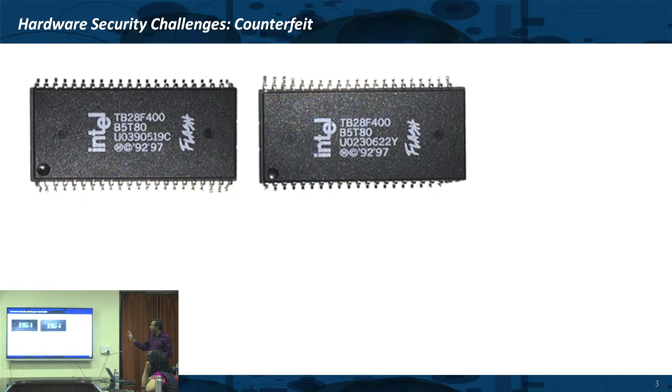For example, here you see this is what we call counterfeit ICs. Counterfeit ICs are something which looks exactly similar. You see the 2 ICs are looking very similar, when one of them is actually authentic and the other one is not. Because if you open it up, you will find that the connections are very different. You kind of just use these chips and then throw it as electronic waste.

Someone can go and collect it from the garbage and just take the packaging and put their own chip and again repackage it and claim that, oh, this is an Intel chip that I'm selling. So they could be inauthentic, they could be recycled, they could be remarked. In fact, you will be amazed to know that 60% of the chips that the US defense uses, like the Army, Navy, are counterfeit. So it's very difficult to prevent this thing.

So the question is, can we use new design or new materials to solve this kind of problem? So that is one problem. The other problem is what we call reverse engineering. This is a term you may have actually heard. One of our neighbor countries is actually expert in doing reverse engineering. They literally take cross-sectional TEM or SEM images of the chip, and then they redesign it.

And now you don't need to buy it from the US anymore, because now you have your own chip. So this is what is called reverse engineering. You just look at the design and then reverse engineer it. This is again a big problem, because then you lose your competitive advantage. So therefore, if you look into the hardware security domain, there are different types of problem. One is authentication, whether the chip is authentic or not. The second is whether it is recycled or remarked.

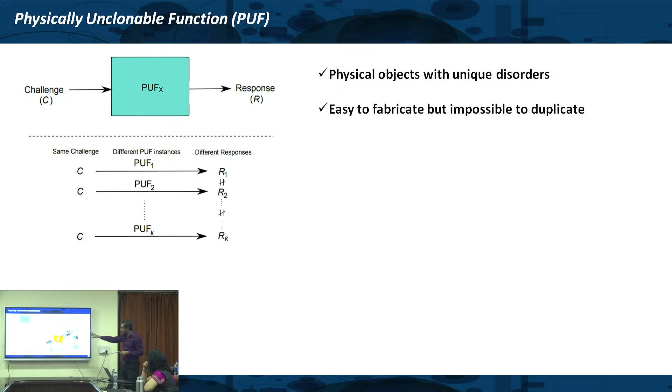The first PUF was discovered only 15 to 20 years back. This paper came out in Science. Here you have a liquid containing a lot of nanoparticles. That is your physical medium, or this PUF. What is this PUF? It's just a suspension of nanoparticles in a solution. We can all make it, right? Now I can use this as a physically unclonable function because we do not know how the nanoparticles are going to be dispersed in this solution. It's a very chaotic or random medium.

So now if I shine light on these nanoparticles and place a screen in the back, what will it create? It will create an image which we call a speckle pattern, because the light will diffract based on the position of the nanoparticles, and I will get an image in the back. So what is my challenge? My challenge is the light that I am putting in, and the response is the image that gets created. So now I have created a physically unclonable function using suspended nanoparticles.

Makes sense? Now let's see whether it's a PUF or not, because it has to satisfy these two criteria. Only then can I call it a PUF. Just having a medium and having a challenge and response is not good enough. It has to satisfy these two criteria.

So let's see the first criteria. The first criteria, what I am saying is the challenge is the same. That means I will keep the light source the same and change the medium, which is this solution with different amounts of different nanoparticles. Will the response change at the background? It will. So it's impossible to know what is the exact position of the nanoparticle even if you make it every time.

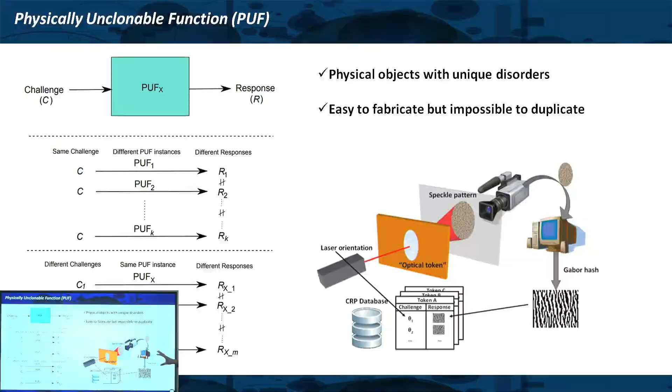Right? So if you keep the medium the same and simply rotate the angle from which the light is coming, or if you change the color of the light, then the pattern may also change. So therefore, if you apply different challenges to the same PUF, the response is different. Make sense? So therefore, we can then use this as a physically unclonable function. But the problem is, this is something I cannot use for a chip. I mean, where will I get suspended nanoparticles within a chip? So what is the solution?

And then if you put two metal contacts and measure the current, not every device is going to give you the same response. And if you measure a lot of devices, look at the device to device variation. And generally you will discard this material, saying that this is useless because I cannot reproduce every time the same IV characteristic. And this is useless for anything that I want to make a logic circuit or any form of neuromorphic computing or sensing. But this forms a background of physically unclonable function because you are looking for variation.

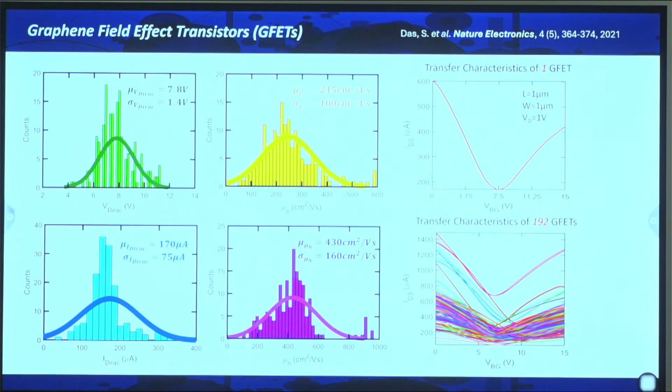This should not change with time. Okay, I will come to that, because if your password changes with time without you knowing... so it should not. That is actually the case. Once you make the device and measure it, it remains stable. But it is just that from device to device, there is a lot of variation. That you have to ensure, right? Over time, you don't have a lot of drift.

So now what you could do is you can take an array of these devices, right? And let's say there are 8 devices. So 8 devices will give you 8 unique responses, right? Because here you are intentionally making sure that there is a lot of device to device variation. One approach is to make sure that your devices are all exactly the same, right? That's what we generally do when we are working with material synthesis or device fabrication. Here the philosophy is exactly the other way around. You want to introduce variation, right? Once you have this variation, then you can literally go.

So your challenge now becomes your voltage, and your response now becomes current. Okay, that makes it more possible for me to integrate it with silicon chips, because current and voltage should be the input and output, not light, right? So now if you challenge it with the voltage, you will get a response which is current, and for any given voltage you will get a different current, and that you can pass through an analog to digital converter like we kind of did last time, and you can get a unique code, right? So now you have for each array maybe a 64-bit key, like the password, right? So now we have generated a physical password.

Got it? Now if I go to another array, you see this key is different because the devices over there are also going to be different, correct? So the key is different, and I can keep doing that. So I kind of keep creating new passwords using just these arrays of devices. So now I have created this physically unclonable function, but now I have to test a few things, right? And I'm going to go through that, but is this part clear, how we used the device to device variation, which is otherwise very bad, for a useful application which is really very needed to ensure the integrity of the semiconductor manufacturing process?

Correct. Yeah. Yes. You should have a larger matrix. Exactly. Because if you have a 1-bit number, then it is 0 or 1. So anybody can predict your password has to be between 0 and 1. So therefore the length of the password should be large, right? Because if it is a 4-bit password, there are only 2 to the power 4 combinations. That's why we have made it a 64-bit password. What is 2 to the power 64? That's a huge number, right?

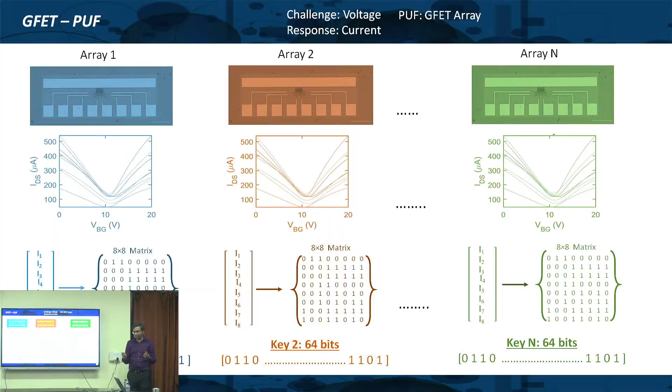So today, are you aware of this RSA encryption? Whenever you send information through the internet, it is encrypted, and at the beginning they put some of these numbers actually, and these are 128-bit long. The problem today is with quantum computing: because these passwords are software generated using algorithms, there are quantum algorithms which can break into these things very easily, because these are generated classically. So if you have 2 to the power 64, 2 to the power 128, it's such a huge number. Even if you give a supercomputer, it will take probably 10 years to find that password, because it has to do trial and error a lot of times. But quantum computers are so powerful, they can break it in 2 minutes, right?

So hardware security is becoming even more important, maybe 10 years, 20 years down the line when quantum comes into the picture, and quantum cryptography is actually a much bigger, interesting area than even quantum computing. Because anybody who gets a quantum computer can break into any of your bank accounts, your health information, any personal information can be hacked very easily with quantum computers.

Okay, so this is fine. So we have generated the keys. Now they have to satisfy certain criteria. And you see the number of total challenge response pairs that we can generate is 2 to the power 64, which is 1.8 times 10 to the power 19. That's a huge number. And you can see that it simply increases with the number of bits.

So 128 will be 10 to the power 38, right? It will be the square of that. Okay, so now the next thing is, we generate these keys using more complex circuits. This is also not always needed.

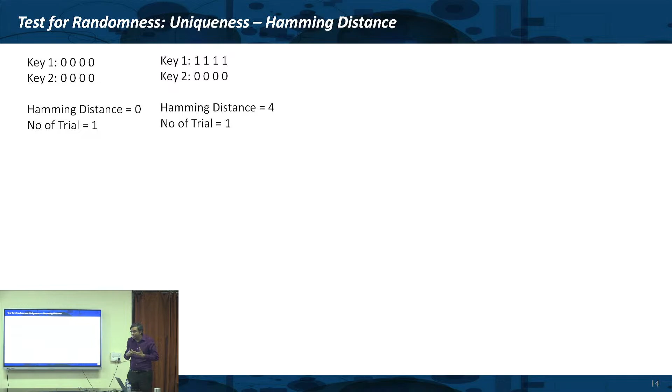So therefore, if I know key 1, how many trials do I need to do to predict key 2? Just one, correct? But then if I give you keys of all ones and all zeros, then what is the Hamming distance? 4, because I have to flip 4 of these bits. But here also, what is the number of trials? Just 1, because if I tell you the Hamming distance is 4, then you know that I need to change it 4 times, right.

So knowing the information about one key and this Hamming distance, correct, will allow you to know the number of trials. This part clear? Okay. But now let's say, for example, if I give you these two keys, and I tell you that the Hamming distance is 2, maybe let's not look into this, I will just do it on the board.

I give you a key which is 0, 1, 0, 1, and then I give you this information that the Hamming distance is 2. Can you predict key 2? Second key. Okay, you tell me one, where you have to change 2 of these. 2 means that you have to change 2 of these. Okay, so you predict 1.

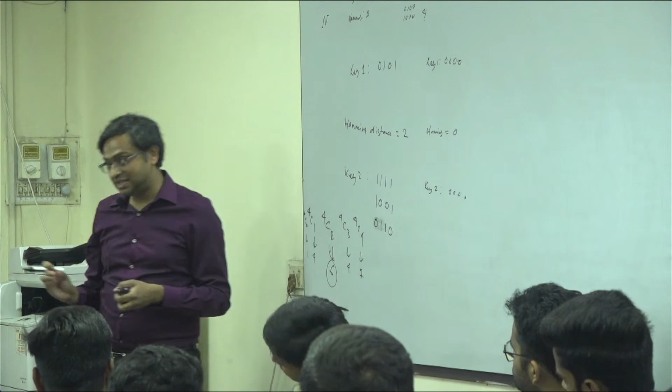So if you have a key of length n, your Hamming distance should be n by 2, half. That gives you the maximum number of trials because you want to make your adversary's job the most difficult one. Makes sense, right? So if you have a key of length n and the Hamming distance is x, then the number of trials required is nCx, and the maximum number of trials will be required when x equals n by 2.

So in a GFET case, n is 64, so we should get nearly 32. And 64C32, look at the number of trials required to decode: it becomes 10 to the power 18. And if it goes to 128 bits, it will be even larger. So once you have these keys, you have to test the Hamming distance. You just write computer code, because you already know your keys from what your hardware generates, and check whether the average distance between key 1 and key 2 is 32. Makes sense? So that is the second rule.

The third one is correlation. How related these keys are. If both keys are exactly identical, they are absolutely correlated; the correlation coefficient is 1. If they are exactly opposite, the correlation coefficient is -1. This is just the mathematical formula of correlation. And the correlation is 0 only when, again, half of them are different. Then there is no correlation.

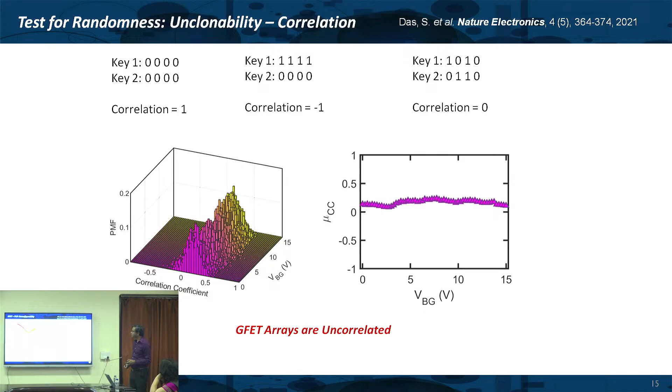Now these GFET arrays are also very interesting because they are reconfigurable, which means that if your key is compromised, let's say for example somebody knows that the key for this chip is this one. What do you do when your password is compromised? You go and change it. But now the problem is if it's in the hardware, how will I change it? It's already there. If somebody knows what are the currents from each of these devices, then they have really accessed my chip and I have no way to recover it. Compromised means it's fully compromised.

These GFET arrays are very unique because you can actually reconfigure them. If we apply a large voltage pulse to graphene FETs, because of this memristive property of graphene, which we did not talk about, but some of you are interested in memristors, I know. So memristors can also be used for physically unclonable functions. So once you change it, because it goes into a different state, and each device will go to a slightly different state, you can create a new key.

And you can show that the new key that you create also follows all the principles that we talked about. The entropy is large, the Hamming distance is 32, and they are not correlated with the previous key. Which means that you can have hardware keys which are also reconfigurable. If it's compromised, you just simply go and reprogram your graphene devices. Then the key is again recovered, just by applying bias. Like in a memristive device, you apply this forming process and different cycling processes.

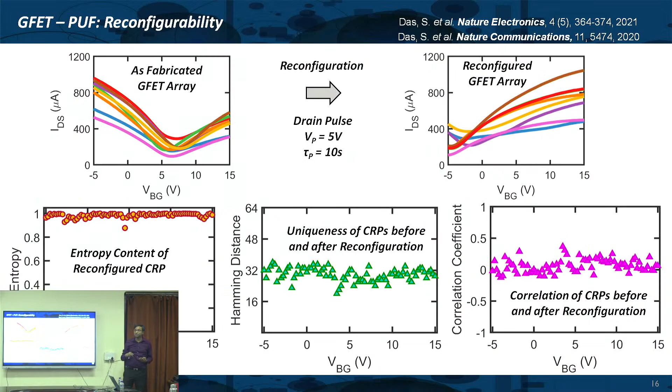But the take-home message is you can actually get reconfigurability in a PUF, which is not possible with silicon PUFs, because silicon is not a memristive material. So that's the advantage of 2D materials, because otherwise you will say, why are you doing it with 2D materials? The idea is that 2D materials give me this opportunity of reprogramming the device. If you are more interested, we have written two papers on this. This Nature Communications paper is about graphene memristors, and this Nature Electronics paper is about the graphene-based reconfigurable PUF. It was almost four years ago now.

And then you can keep reconfiguring it, and that's what we show. This is not as important, but you can not only reconfigure once, you can reconfigure it multiple times. The more times you can reconfigure, the better it is. So that is something we can do with this PUF.

And then there are other things that you have to check, because you asked about reliability. This has to be reliable with different voltages that I apply. The conductance should not change. And graphene is good because it shows a linear IV characteristic. So when you are working with a memristive-based PUF, make sure that the memristor has a linear IV characteristic, because then even if the voltage changes a little bit, your current can change, but your conductance is not changing. That is one.

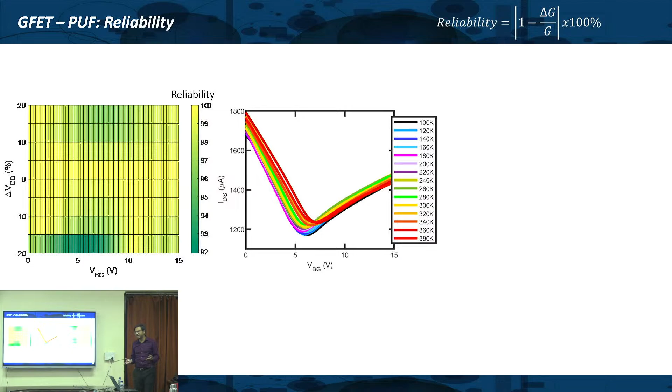You have to also show that the devices do not change too much with temperature, right? Because you do not know at what temperature the chip will be accessed. So your PUF should remain the same with temperature. So we show that it is stable with temperature, and these are essentially the reliability. Almost 90 to 100% of the cases the PUF remains the same. Some changes will happen because this is hardware. You have to deal with that. So GFET PUFs are reliable against supply voltage and temperature variation, which is also very critical for a good PUF.

Okay, and then finally comes this part: whether they are resilient to machine learning, because nowadays we may not need to do all this Hamming distance calculation and stuff. Can we train, let's say, for example, I collect a lot of graphene device data, this variation, train an artificial neural network, and ask it to predict what will be the next key, or what will be the possible keys. And this is something that we have to check.

So here we are using something called regression-based machine learning. I will probably not go into the detail of that. These are all the estimator functions and stuff. So we are saying that we are going to predict up to a certain part of the key, and then can it learn what will be the following bits. That is how we train it. You see, these are the estimator bits and these are the predicted bits. For example, not everybody needs to know your full password, but if they have a part of your password, life may become actually easier, right?

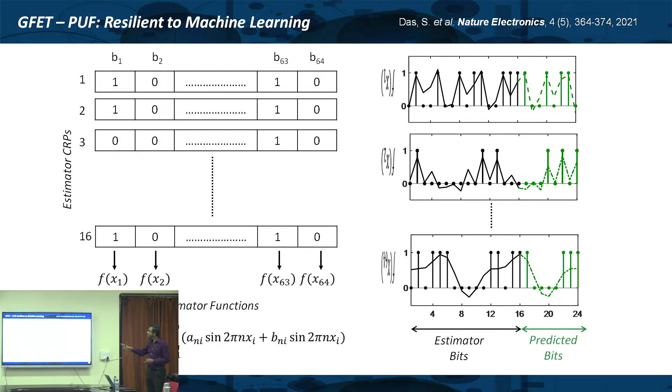So that's what we are trying to do over here, and there's a lot of results over here. Don't get overwhelmed by this. If you're interested, you can read the paper. This is actually resilient to machine learning attack, because this is coming from natural randomness. There is nothing to learn. Machine learning could only learn something when there is some underlying physics going on. This variation is kind of random. So therefore, we show that at least the regression-based machine learning or the support vector machines cannot actually learn these things.

And then we go into an even more powerful machine learning tool, which is the generative adversarial neural network, or GAN. This is what, when you ask ChatGPT to produce a picture of something, it uses, the generative one. Because at the end of the day, all our innovation comes from the generative part of our brain. It is not something we have seen earlier, but we can create, like a poet or a novelist or a music director. They are creating something literally out of nothing, or maybe their knowledge. So these generative networks are becoming extremely powerful. Deep fake is this technology. It can create things which look like an art piece created by Picasso, for example.

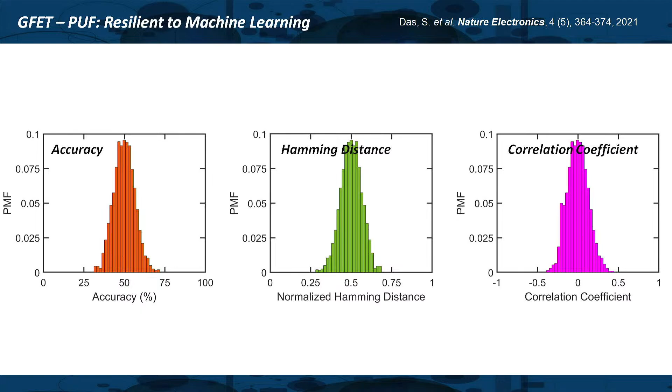And as I told you, you don't have to restrict yourselves to graphene. We can also use MoS2 devices. MoS2 devices also show device-to-device variation, and then we can create a similar PUF, but now it's a MoS2 array. If you are working with any other material, you can use that too and create the same matrix. It doesn't have to be just 2D material, but you have to prove that the other factors I spoke about, the entropy, Hamming distance, correlation, machine learning attacks, they can survive. Okay, this part is all good.

This is what we show over here, like the Hamming distance is like half. So this is all about physically unclonable function. If you have any question, ask me. I will go into the next topic on hardware security. Any questions about physically unclonable function?

I feel like this is something a lot of you who are working with materials can actually do. And it doesn't always have to start with IV characteristics. You can also use Raman, PL, XRD data in order to create that PUF. Because if you measure the same device, let's say same material that you're synthesizing, and take the Raman at different location, the Raman peak position will be slightly different, right? And there have been papers where people have actually used that to create physically unclonable function.

Because then it is like an optical PUF, because your input is kind of a light and the output is also you are measuring some of the vibrations, right? So you can really use any kind of a technique even beyond IV to show that it is a random entropy source and it can be used for physically unclonable function. Okay? Yes?

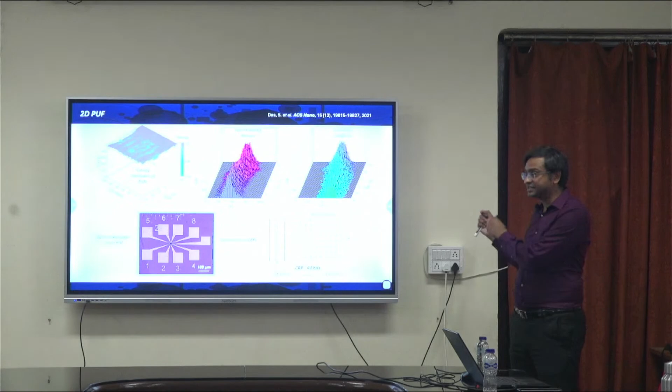No, this is to authenticate. Because let's say, for example, if you have chips from Intel, right, and then there is a startup company which is also making a chip, but they could package it in the same location, and they could bribe the packaging facility so that, okay, you put the Intel cap on our chip, right? Now if somebody comes to you and sells you that chip, you will not know which is actually an authentic Intel chip.

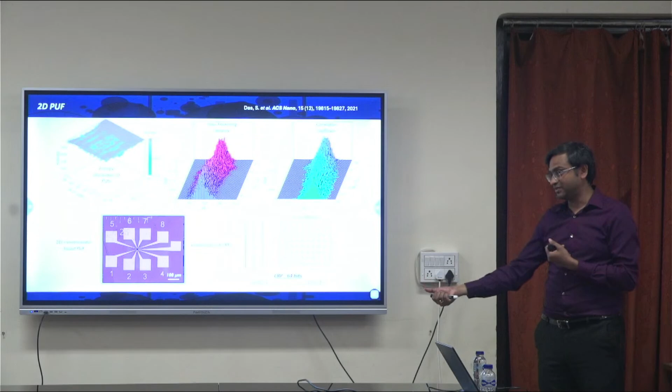But then Intel can tell you that, okay, in my chip, you should be able to use this password to make it work, because we have put these graphene devices, and they don't have to even really tell you what is there, right? They will just make this kind of an arrays of devices, and they will measure and know the key, and then they will tell you this is the key that should be there in our chip, which is not available to your adversary. Even if they make a graphene chip and put their graphene devices, it will not be the exact key. You see that, right? So this has nothing to do with the functionality of the chip. This has to do with the authenticity, and this is a big problem in the industry right now.

Could be good, yes. Optical would be easier, it is just that it has to go through your packaging, because the packaging material is often not transparent. Correct. Agreed. You can, I mean, there is pros and cons in both aspects.

I think whenever you put the chip on a printed circuit board, you have access to the IV characteristics of the chip. So it is much simpler to do it using IV than using optical methods. Because at the end of the day, it will be integrated into some circuit, right? And you need to simply write a code to first check whether it's an authenticated chip or not. Possible, yeah. Okay, this part is good, right?

Okay, so now we will go into the next topic, which I call camouflaging, which is to prevent reverse engineering. So what is reverse engineering? Reverse engineering is, let's say for example, you have a circuit which is designed by some US engineer, and then it has been sent for production. Somebody actually opens up all the packaging and sees what is the configuration, and then they start claiming that this is my design. And then they can sell it at a lower price to someone else, right? This is reverse engineering pretty much. So we have to prevent this reverse engineering.

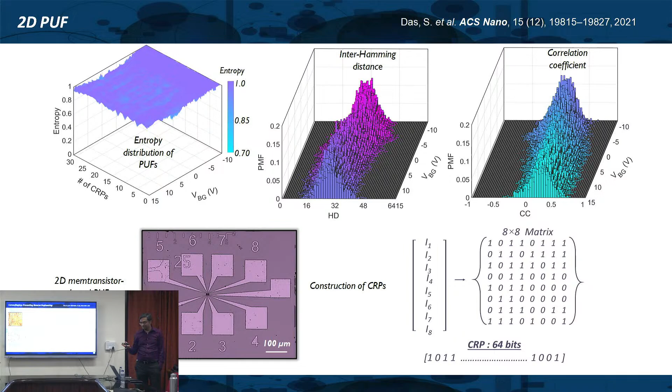So in order to stop the reverse engineering, we have to fool our adversary, right? So this is something I am going to show you now. How can we use unique properties of 2D material to camouflage circuits, so that even if somebody sees the circuit, they will not know how it functions. If they cannot know what the function is, then I have been able to kind of fool them.

Then we spoke about this oxygen plasma treatment, didn't we? And when you do treat it with oxygen plasma, it's like a self-limiting process, but you can actually convert the top layer into transition metal oxide, like moly oxide, tungsten oxide. And these oxides are transparent, because most of the oxides are transparent. So therefore, the appearance of the flake does not change.

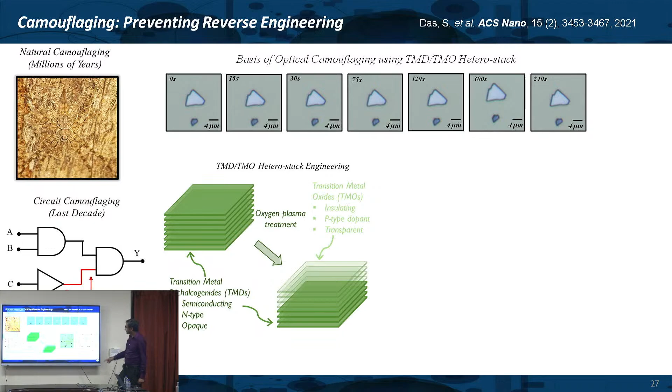Now let us say, for example, if I go ahead and make a device, right? I do not know whether it is an n-type material, whether it is a p-type material, and if I do half and half, how does it become? It becomes a p-n junction, which is a diode, right? So now your resistor, transistor, diode exactly look alike. Makes sense? So now if I go and start building a circuit, I will not know, for example, let me see, there is an example coming up. Okay, there is some more data actually, just showing what happens.

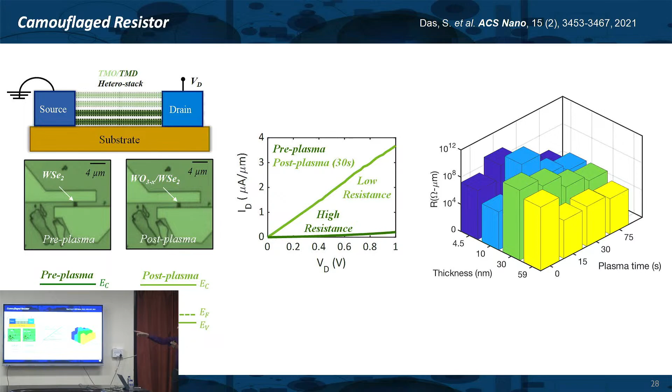You see pre-plasma, post-plasma, I can use it as a resistance, because generally you cannot change the resistance value of a resistor, right? But now through oxygen plasma, you see, I can get two resistance values without changing its appearance. So your adversary will not know whether it is a high value resistor or a low value resistor, correct?

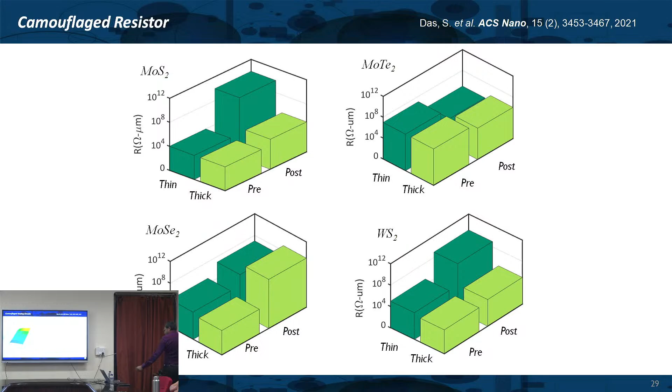Got it? So if all these elements are simply resistors, will you be able to say what this circuit is? This is just a voltage divider, right? Correct? But if this is a resistor and this is a diode, what will be the output?

A lot of you probably have not taken. This is a rectifier, right? If this is an NMOS transistor and this is a PMOS transistor, then this is kind of an inverter, right? So depending upon what these elements are, the function of the circuit, the output and input are changing, right?

So for you to know what is the output for a given input, you need to first know what these elements are, correct? Understood, right? So if each element looked different, then by looking at it, you will be able to tell, oh, this is a resistor, this is a diode, so this is the function. But if you do not know any of this, how many trials will you need in order to find out the actual input output? Because then you are predicting.

Exactly. Very good. 3 to the power 4, because for each choice here, I have 3 choices here, 3 choices here, 3 choices here, right? So 3 to the power 4. This is what I am showing, that if there is a circuit which has P elements, and each has got m functions, then this is the number of trials. So you see the idea of camouflaging, right? If everything looks alike, it becomes exponentially difficult for your adversary to figure out the function. And this is something that I have shown you using a simple circuit diagram.

Here there are only two elements, right? So here is a resistor, and here is this camouflaged element. If this camouflaged element is a resistor, then it's a voltage divider, and if it's a PN junction diode, then it's a rectifier. The output is very different. So what did I accomplish? I camouflaged my circuit. Isn't that true? So I don't care about reverse engineering, because you can look at what the design is, but you will have to go through this many trials to tell me what it is actually doing. Correct? And the same thing applies for even bigger circuits.

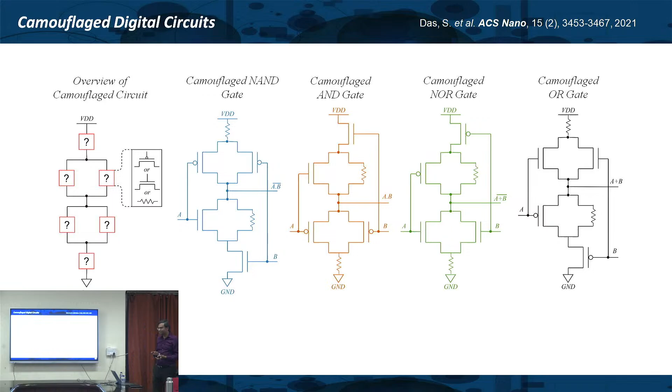This is another aspect, and now you can start doing it. This is an overview of a camouflaged circuit. So here, forget about this. If I create a circuit like this, because all our AND gate, OR gate, XOR gate have a particular structure, right? How they are arranged, correct? But now, if these are all kind of question marks, I can use a generic structure, and then I can create individual gates just by, so therefore, the OR gate, XOR gate, NOR gate, XNOR gate, everything is going to look alike, right? So I can completely fool reverse engineering. That's the thing that we are trying to do.

The only way to find out whether there is something going on, you can now start taking some SEM images. You can start doing some AFM, because the height will be a little bit different after the oxidation, right? Or you can even do, let's say, Raman or PL, correct?

And then you can find out that, oh, this material has been oxidized, correct? Material characterization. You see, pre and post plasma treatment, the Raman shift is there. Then you can say, but think about, in your integrated circuit, how many transistors are there? 1 billion. Are you going to take SEM images of 1 billion transistors? Are you going to take Raman, PL or AFM images of 1 billion transistors?

You can, if you are given the age of the universe, right? So nothing is ever foolproof, but the question is how much time and resources your adversary has to invest in order to decamouflage it, right? It is always the race between the cop and the thieves, right? You have to be ahead. You have to be well ahead. If you are the thief, you have to be well ahead, right? So that the cop can never catch you.

So they will actually take cross-sectional TEM, SEM. They will open up the chip, and then some countries have resources and manpower. Okay. Yeah. You see, it is also not really about needing to know every detail of the chip. If you know some details, then you understand, right? Because your chip is not going to be unique at every position.

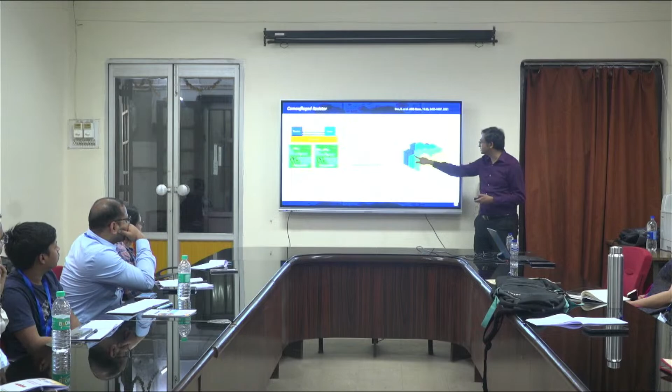You see, depending upon the plasma treatment time and the initial thickness of the flake, the resistance could be anywhere. So even if you do a Raman, you might be able to say, okay, I know that it has been plasma treated, but how do I know what is the exact resistance value? And as I told you, in the R2R ladder, if the resistance values are R versus 2R, then the function is completely different. So even if you do that, it is even more foolproof. It's difficult. This is where I was talking about the number of trials that is required, right? Remember this plot that I showed? Yeah, this one.

Well, it depends upon what philosophy you want to follow, right? This is a discussion we can have off camera, not on camera. Okay, so this is what it is.

So I have told you two different things, and let me skip this part because this will be too much. I will go to the summary. So you see that hardware security is absolutely important, and I think 2D materials could be a rescue, both from the point of authentication as well as preventing the reverse engineering of these different chips, right? And you can also use other materials. We are working on 2D materials, and if the next generation of technology is 2D, then it is better to do everything in 2D, but it doesn't restrict the use of other kinds of materials for this hardware security application.

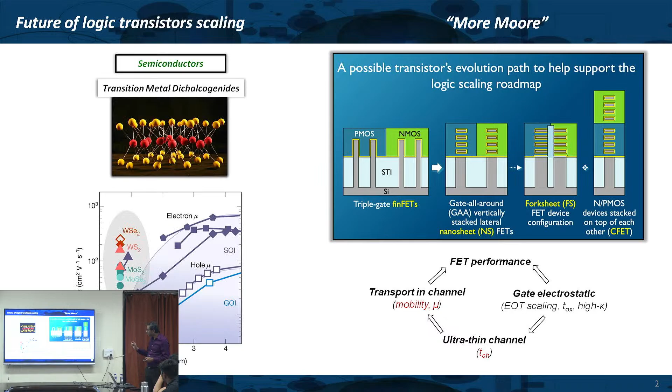So, we have already highlighted that the future of logic transistor scaling, which is literally to revive Moore's law, is going to be based on some of the newer materials, and 2D materials are one of the prime candidates. Now, if we think about Moore's law, even if we make the transistor very small. So today we are talking about the 7 nanometer node, TSMC has already introduced the 5 nanometer node, and there are some angstrom nodes, but I want to first clear the confusion that these nodes have nothing to do with the transistor channel length.

The transistor channel length today is kind of stagnated around 20 nanometers or so. It is not scaling. So when they come up with this node, it has a different meaning altogether. We do not really know the exact transistor dimension for TSMC's most advanced 5 nanometer node. So the limitation of why we can't make the channel much shorter has nothing to do with the fundamental material properties. It has more to do with the lithographic capabilities.

The tools made by ASML, a company based in the Netherlands, make the most advanced EUV tools. They cannot currently scale down how small a feature we can get using this EUV technology. Once that is enabled, these materials are ready to be scaled much further. But one day we will probably get to a limit where the transistor channel length cannot be made below, let's say, 10 nanometers.

So what do we do in order to get more transistors? Because Moore's law is nothing but your transistor chip density increasing every 18 months, and that is not happening right now. What is happening is we are simply putting more and more chips together, and this is what all the cloud servers are. The size of these huge data centers is literally exploding.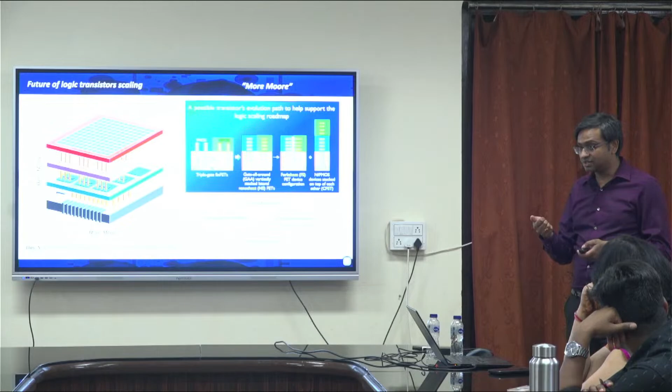So the way forward is literally trying to stack transistors on top of each other, because if I can start building vertically, this is precisely why if you go to a city, you will find all the apartment buildings are tall, because you cannot give space to everyone in the lateral dimension. So you build skyscrapers. That is why 3D integration is going to be important for logic transistor scaling and to revive Moore's law.

And to some extent this has already happened for memory technology. The flash devices that we spoke about, and the flash drive that many of you are carrying right now, do you know how many levels of transistors are there? There are 232 tiers. It is a 232-storied building inside your flash drive. In fact, the most recent one that Micron has introduced has 500 tiers. It is even bigger than the Burj Khalifa. The Burj Khalifa has, I think, around 200 floors. 232, and now it is 500.

So this is literally building skyscrapers inside the flash drives that you are using, and that has given you this amazing memory storage capability. Just 15 years back, all these flash drives used to only hold megabytes of data. Today they can do terabytes. How? Because of 3D integration. So 3D integration has already shown us what you can do with storage. It has not been possible for compute.

Therefore, the size of your memory chips has gone down while the data centers have exploded, because we could not do 3D integration with silicon devices. Why? Why could we do it with memory, but not with logic? Because once you have the first tier of devices, since silicon is grown at a very high temperature and then you make these devices, if you want another tier of silicon on top, you have to increase the temperature again.

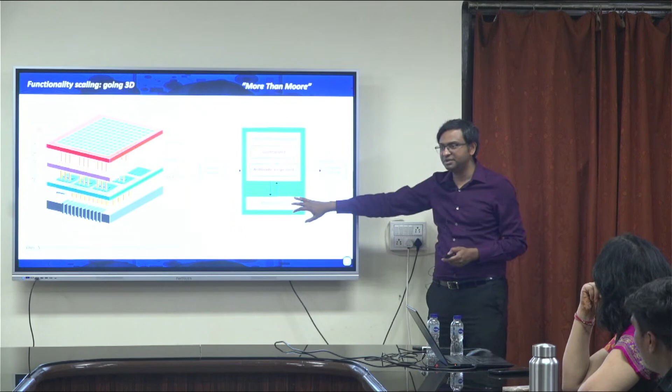Okay. And then, as I told you, there is this problem of your logic unit and the memory unit being separate for neuromorphic computing, because at the end of the day the brain is 3-dimensional. If you really need to have a computing power like the brain and make it small, you have to start doing 3D, because the brain is actually 3D, correct. When we have this huge gap, remember the size of a data center is like a football field, and our head size is like 6 orders of magnitude smaller. Why? Because it is 3D. The chips are not, right.

So, we have to start doing 3D also to address the critical need for artificial intelligence or neuromorphic computing, because of this problem that we had a lot of discussion on, this neuron synapses and the separation between logic and memory. So, now in this 3D chip, you can dedicate one tier for memory, one tier for logic, and they are right next to each other, correct.

So, you can do this kind of a functionality scaling as well, and one tier could be for sensing. So, everything is now compact, just like how your brain works, right. Your different tiers of neurons simply do different functions. That is something you can do with this 3D integration. And this is a slide that you have already seen. So, this can actually mitigate a lot of energy challenges for the next generation of neuromorphic and AI chips.

Now, there are different types of 3D integration. You can do a wafer to wafer bonding. Okay, I will not go into too much detail on this, because I think none of you are from this area. There is a chip to wafer bonding and there is a chip to chip bonding. They are just different ways you bond them, and then you use this technology called the through silicon vias.

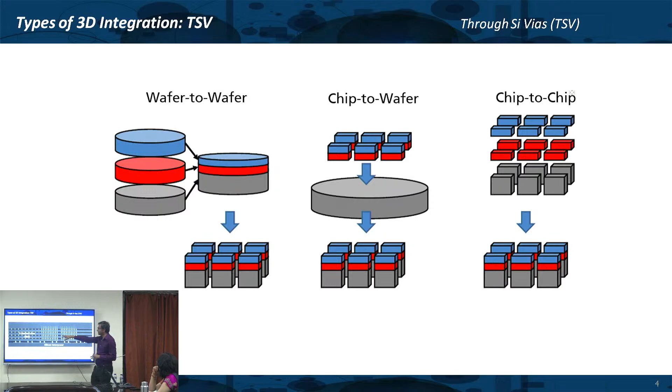So, not only are they scaling the memory technology in the vertical direction, they are also stacking chips on top of each other. And that is what is happening with your most advanced GPUs and TPUs. So, they use this through silicon via technology. This has already been commercialized. You can do it for DRAM. This is the high bandwidth memory. This is all through silicon vias.

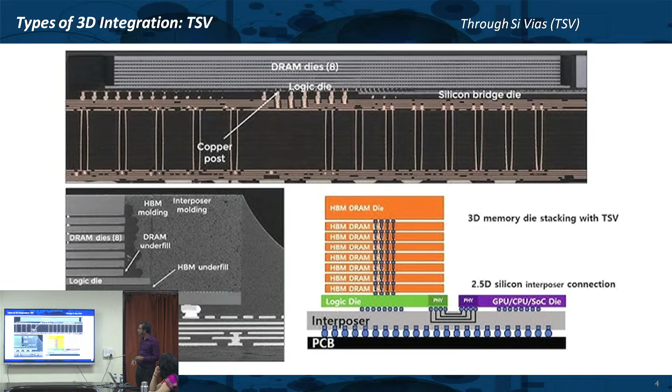Okay. So, generally the key step of the through silicon via fabrication is that you need to really do this deep reactive ion etching, in order to create this high aspect ratio of vias, because these vias are very tiny in the lateral dimension, but very long. So, you are trying to literally dig a very deep hole, and that is always a very big challenge for this through silicon, because you are literally digging it through the entire substrate, right.

Just think about digging a very deep and narrow hole in the ground, a very difficult job actually, right. And then you also need to deposit a thin insulator layer on the wall of that, so that when you deposit metal, the metal does not diffuse into other unnecessary parts. So, that is the other thing. So, isolate the TSV from silicon, and then you need a barrier layer like titanium or titanium nitride, because you have to stop the metal diffusion. These are called the diffusion barriers.

And copper is most commonly used to fill these vias because of high conductivity, using electroplating techniques, but tungsten and polysilicon are also alternatives, and then you do chemical mechanical polishing in order to ensure that the TSVs are planarized. So, there is a lot of fabrication process that goes into just fabricating the via, and we are not even talking about fabricating the chips. Just to connect the chips, you have to go through this extensive process.

It's pretty expensive. Okay, so the challenge is that you need precise etching, metal filling, planarization, a lot of processes, and then the TSVs introduce hotspots in densely packed vias, because in certain areas, if a lot of computation is going on, the temperature could be very high, and that could start thermal migration of copper, and that can really mess up your devices. Okay, so TSVs are good, but they are not the ultimate solution.

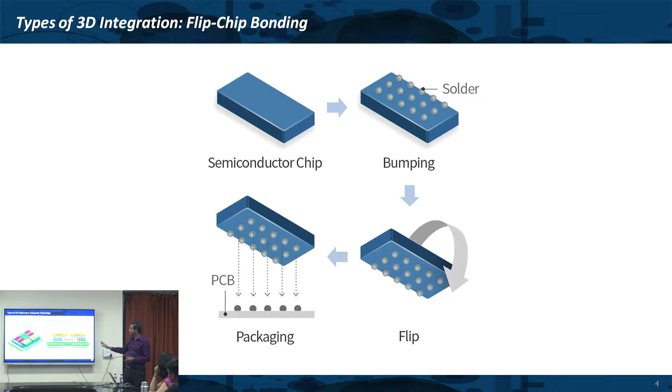Okay, there is a new technique which is called flip chip bonding. Again, I am not going to go into too much detail on this, because it will not be that interesting for this audience. And there is also 3D heterogeneous packaging, where you take a memory chip, you take a logic chip and put them on an interposer or a packaging substrate. So, these are just different ways the industry is currently doing 3D packaging, which is also a big thing, and some of you may be interested in 3D packaging, because this is most likely going to come to India. Okay.

From the Indian perspective, the Indian Semiconductor Mission is currently focusing primarily on 3D packaging. Okay, a lot of companies like Apple are interested in setting up packaging facilities in India, because we are not manufacturing high-end chips, but you can start putting things together, and that's actually a much easier challenge, because labor might be much cheaper in India to do the packaging. So, packaging is actually going to come to India quite a bit.

And these are the existing technologies that the industry is currently working on, and there are certain advantages: high bandwidth, better thermal management, improved scalability and signal integrity, and it also offers high density interconnects. I am just skipping these things, because once I post these lecture notes, you can go into the details. So, what I want to come to is the fact that this is the trajectory the industry is currently tracking, 3D heterogeneous integration.

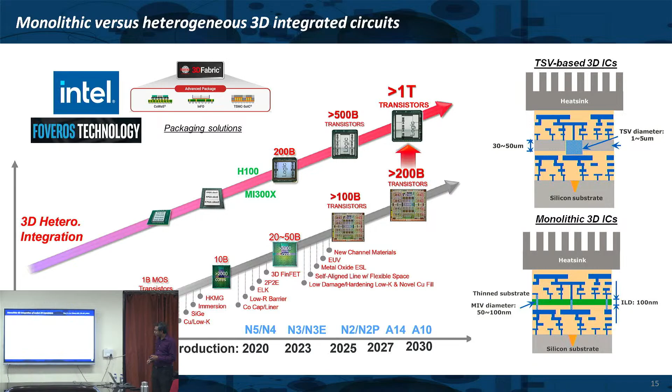Okay. So, this is what we have started doing, and this is one of the first demonstrations where we actually did a 3D integration of 2D transistors, because so far we were only talking about transistors in one tier. So, now this chip has got transistors in 2 tiers stacked on top of each other, with each tier having 10,000 transistors. Okay. So, we published it in Nature because nobody has demonstrated this level of integration so far in the field.

Okay. People generally report one device most often, maybe 10 devices, right. Going and demonstrating 30,000 was a completely different ball game altogether, right. So, we could do it because we have automated measurement capabilities as well. So, it is not like a student is going and measuring 10,000 devices, then it will probably take their entire PhD. Okay. And we can make these devices pretty small, 45 nanometer channel length.

I have also shown you channels even smaller. We can go down to 20 nanometer channel length, extremely scaled devices, which means that this technology can be scalable. And as I told you, we do not stop at 2 layers, we have like 3 tiers of devices, 1, 2 and 3, right. And therefore, you can now start making all these vertical circuits, right. That is a different domain for circuit designers.

So, if some of you are interested in circuit design, how do you route, where do you place your NMOS, where do you place your PMOS. This has been a problem in the planar dimension. It is going to change completely when you go to the vertical direction, right. So, that is an entirely different field that is going to start.

Correct, correct. So now, what type of software? We use the same software right now, but it is just very tedious to design these chips. I think we spend probably more time in the design than actually fabricating, because once the design is ready, you just go and write layer by layer. I will come to how many layers there are.

So these are some of the devices you see: 10,000 devices measured in tier 1, another 10,000 in tier 2, right? And then these are scaled devices, close to 1,000 for tier 1 and tier 2. These are some cross-sectional high-resolution TEM. And here is the fabrication process. You can see how many steps, right?

So first we do the tier 1 gate. First we do the gate, then we transfer, then we do the gate oxide, which is our floating gate. Remember, we want to integrate memory and logic. So we do alumina, hafnia, alumina. Then we do an etching process, which also requires e-beam lithography to define the pattern, then go and etch it. So an e-beam is involved with the etching.

Then we transfer the MoS2. Then we again pattern using e-beam, and then we etch the MoS2. Now I have a channel, I have a dielectric, I have a metal electrode. Then I do another e-beam lithography and e-beam evaporation to put the source and drain contacts. This is how we make tier 1.

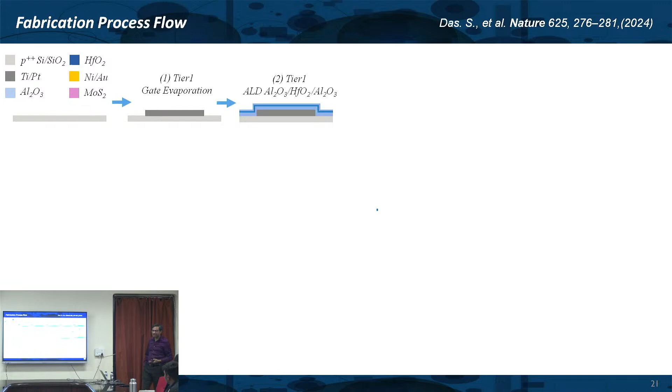After that, you put the inter-tier dielectric, because we have to isolate them electrically. So we put something like an aluminum oxide spacer; it's an insulator. So that is my full fabrication of tier 1. Then you simply repeat: again gate evaporation, again alumina ALD, again gate open, again transfer, again etch, again source-drain contact, and then you get to tier 2. And you keep repeating it, and you get tier 3.

At that point, you have to start etching the inter-tier dielectric and start making these vias. But these are no longer through-silicon vias; these vias are now very small, and they are connecting transistor to transistor, which we could not do with the heterogeneous packaging industry. Make sense?

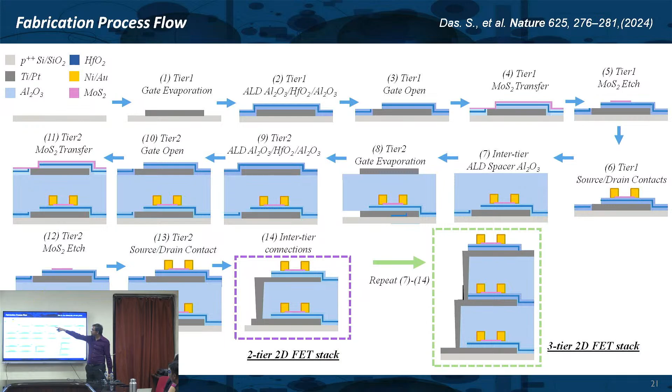Which gray color? This dark color. Right now we are using, you see the color over there, platinum. You can use any other metal. We are not using copper, because copper requires electroplating, and as I told you, electroplating is more difficult for us to do. So we just use any metal for the interconnect. There is a lot more engineering to be done to optimize this structure. This is not a fully optimized structure.

So sir, these are not like... No? Yeah, there are tiers separating those. These are devices in tier 1, tier 2, and tier 3. This is our N-type MOS device. This is P-type. So we get CMOS capability, NMOS and PMOS. And as I told you, each of these devices is programmable. That means I have both logic capability and programming capability, so memory and logic are both there.

They're all responsive to light, so they can also be used for sensing. So sensing, logic, compute, all are there in each of these 30,000 transistors. That gives us enormous capability.

And here I write down the number of lithography steps. If you want to fabricate a 1-tier device, there are 4 e-beam lithography, 1 atomic layer deposition, 2 etching, 1 2D transfer, and 2 metal evaporation steps, total 10. As you go to tier 2 and tier 3, the number simply increases. There are 38 lithography steps. It's a Herculean task for the students who did it.

I think they did not take long. They made this entire thing in a month, working literally day and night. There were 4 students working on this. You have seen a relay marathon, where one person comes and holds the baton; it was going 24/7 with this one chip. Do you know how much we spent making this one chip?

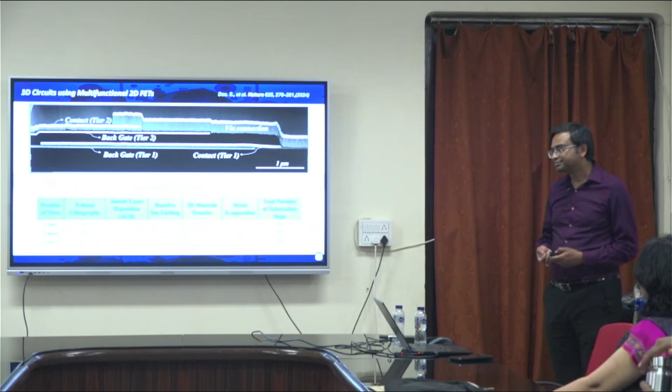Okay. So, you can see the number of steps, and every step has to go and work fine, right. Anything goes wrong, you have to start from scratch. So, that is why I am saying, I had to choose the 4 most competent students to do this, and they literally required only 1 try, they did it in once. Extremely competent students, and eventually they were rewarded by this publication in Nature, right.

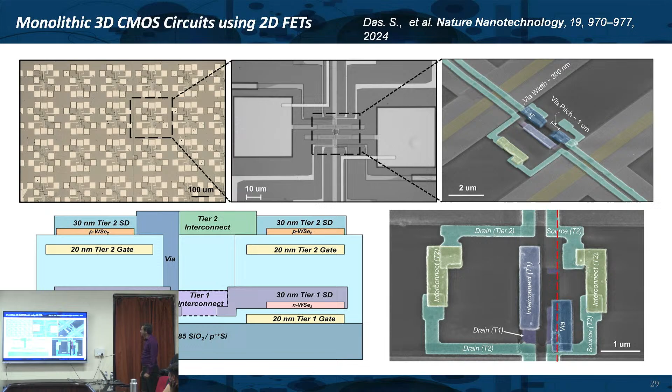So, now I have the same material giving me both N and P. So, what we thought about, why do not we integrate this into a 3D architecture where we have NMOS in tier 1 and PMOS in tier 2, right. So, now I am making a NAND gate. Earlier this was just simply transistors, now this is circuits and CMOS circuits, right. And you now see what is the via. Via is only 1 micrometer. Very small vias we can make, which is not possible with the heterogeneous packaging technology, right.

Here is the cross-sectional TEM, this is pretty wonderful looking. You see, this is my tier 2 tungsten selenide. Each device has this floating gate stack. Here is tungsten selenide bilayer, and then this is, I think, again tungsten selenide bilayer, right. And you can see the via connecting the 2 tiers of devices, okay. And then we make all sorts of logic gates, inverter, NOR, NAND, and here is the comparison, okay.

And here you can clearly see that this is where we are competing not with academic institutions anymore, we are literally head on with the industry. And these are all through heterogeneous integration, packaging technology. You should be looking into this number and maybe this number, this via pitch. You see the via pitches of the order of tens of micrometer. Very recently IMEC, just last year, has introduced 1, and we are just starting in an academic institution with this number, right. This is not even generation 0 devices. So, this is the power of monolithic 3D integration, right.

1 micrometer, in fact, now we have gone down to even 300 nanometer vias, right. And you can see this is the integration density, kind of. So, the number of vias, the number of connections you have per millimeter square, and you can see we are already as good as what is happening with the heterogeneous integration. BEOL compatibility means that we can do it at a very low temperature. The entire process that I showed was done at 180 degrees centigrade. I told you, back end there is a process temperature limitation to 450, we are not even close to that, we are at a very low temperature.

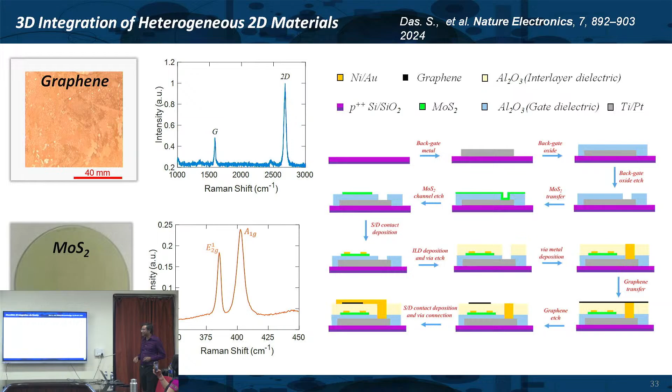And then we have amazing faculty who are equally motivated in collaborating. So we give them the sample, they give us these TEM images within a week. If you go outside to do it, it will take you at least 2 to 3 months. That also sped up our progress a little bit.

Otherwise, we cannot compete with some of our competitors which are India's neighbor. I guess you can have a guess which country I'm talking about. Okay.

So then we do some experiments showing that we can actually take an analog signal generated by this chemisensor and then digitize it. Because remember, this is something we need to do eventually for any kind of artificial intelligence or neuromorphic computing. And now we are doing it in a 3D chip. We are not doing it in a separately packaged chip. So that's the other advantage of 3D integration.

This we published actually as a cover. This is what we were talking about. This was the cover of Nature Electronics.

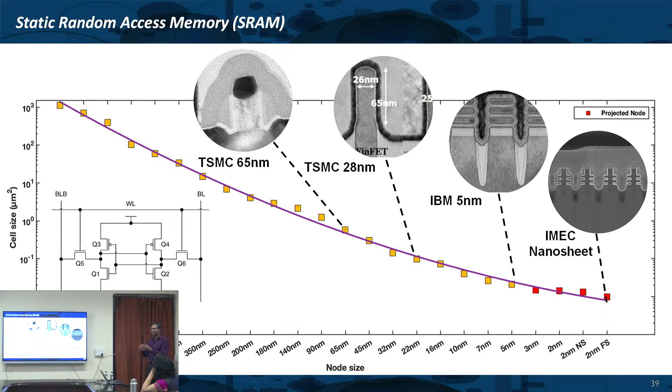4 months, yeah. And then you can also do something called SRAM scaling, because static random access memory, some of you may know, has 6 transistors. And the main reason that today we cannot really make our GPUs even faster is because the SRAM cell sizes are not going down. But now with 3D integration, you can automatically see the benefits. I don't have to put all 6 transistors in tier 1. 3 can go in tier 1 and 3 can go in tier 2, and then the cell size reduces. So that's what we are also trying to do.

And these are all the design software. That's why I was saying the design now becomes way more challenging, because you are not just putting 2 transistors on top of each other. There are connections as well, and making this layout design takes a long time. So my students are now getting more proficient at using all these design softwares. There are different footprints, different ways you can place these transistors. That's why I'm saying it's a new field in itself.

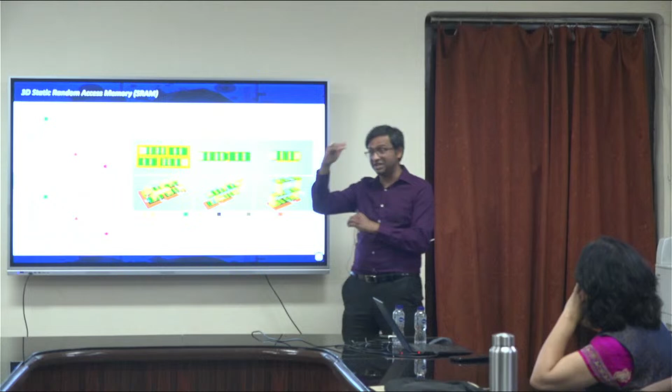How do you put the transistors? Where do you put the NMOS? Where do you put the PMOS? So you have to really figure out how. And as the number of tiers increases, the complexity of the design also increases. Correct? So we show that we can have... So we do it ourselves. We do it ourselves.

Yeah, that is where we can. We have in the past done COMSOL simulations. So we will eventually bring in COMSOL simulation to understand the mechanical robustness of the structure.

Okay. And this is the 3D SRAM array that they built. You see the area, reduced footprint. These are the SEM images of a unit cell. These are cross-sectional TEM, showing devices on top of each other. This is another image. This shows that the SRAM cell actually works in this 3D integration pattern.

And the advantage is that in the same technology node, even when you are making a bigger device, you can address the need of a lower technology node, which means that I am able to do better scaling with this 3D integration, which is quite natural, right? Because now every cell will have a smaller area, even if the device dimension remains the same. Generally, you reduce the device dimension to make the cell area smaller, but I don't need to. Simply by putting it on top, I reduce the effective footprint. That's another advantage of 3D integration.

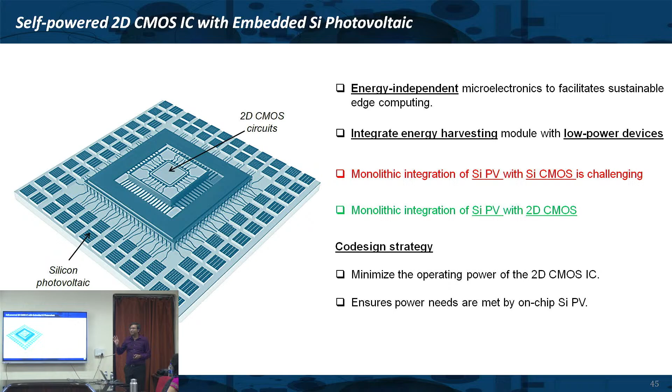So far we have logic, memory, compute, and this is the ultimate. We are also powering them and making them self-powered, so that you don't even need a battery to run this device. So what are we doing here? We are integrating solar cells in this 3D structure. That is something that we have started doing.

Monolithic integration of silicon photovoltaics with CMOS is challenging. You cannot integrate a silicon CMOS transistor on a silicon photovoltaic, no way. The temperature will kill the photovoltaics. But I can do 2D CMOS with silicon photovoltaics. So that's what we are trying to do. Now the chips are going to be self-sustained. The main problem is that silicon CMOS requires high temperature processing. At that high temperature, you will destroy the photovoltaic cells.

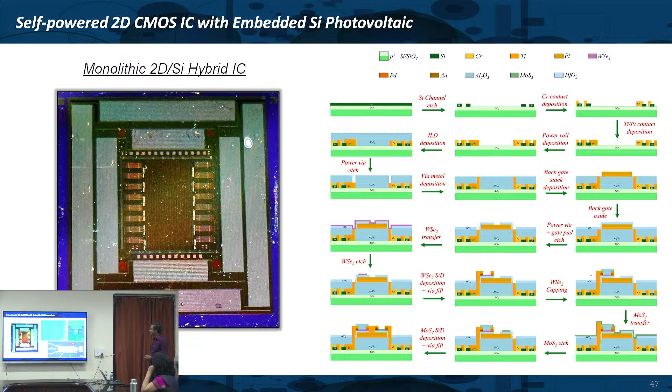So these are the silicon photovoltaics. We are using a very simple one, not even a PN junction. We are using a Schottky barrier solar cell, platinum, chromium. Because of the work function difference, we get a very nice photo response, and then this is the design of the 2D CMOS circuit.

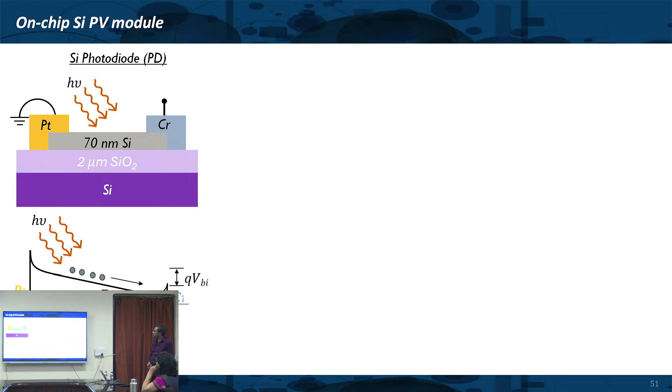So this is going back to very fundamentals. It's a very basic solar cell that you can make, because now I have two different metals at the two different contacts. There is a built-in electric field. I don't always need a PN junction. And whenever I shine light on it, I can really get this nice photovoltaic effect.

The maximum power right now is very low, 130 picowatts for a single solar cell. So I cannot use a single solar cell because my requirement for a 2D CMOS transistor is much higher, of the order of nanowatts. So what do I do? I make an array. If I increase the length of the array, I get much higher open circuit voltage, but I also need current, so I make a lot of them in parallel.

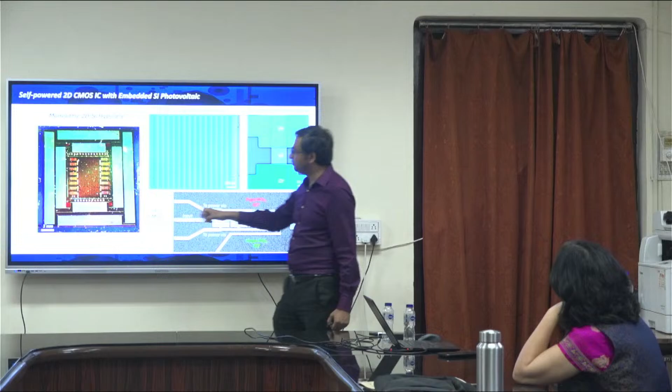So in order to run these chips, if you go back to this picture, you will see that the device we are measuring is this tiny, and the rest are all solar cells. You can see the ratio of the footprint I need for the solar cell versus the device. To drive even a tiny device, I need that many solar cells, but we can improve on that. This is right now a concept, but this is the first time silicon PV has been integrated with 2D material in a 3D architecture. So that is all brand new.

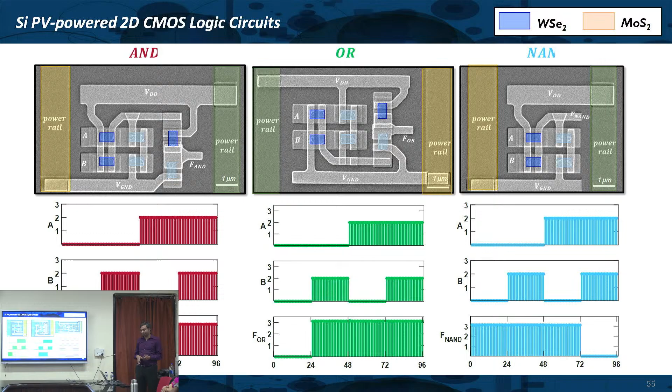And we have shown that this operates all the logic circuits functionally, both combinational and sequential logic circuits, because our ultimate goal is to run a microprocessor using silicon PV integrated on chip. So we are making progress towards that.

Yeah. So I think you have to make sure that the PV part is exposed. Wherever the PV part is, it has to be exposed, because then even ambient lighting can do it.

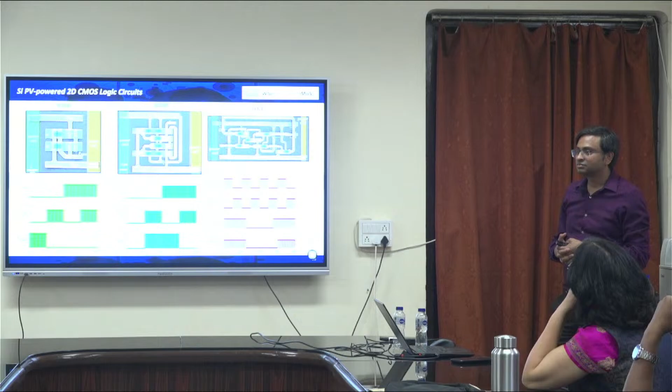Yeah, you can do that. You can integrate any kind of energy harvesting. You can do thermoelectric generators as well. So, lots of work is going on, yes. It will be a different set of materials. It's just integration becomes a challenge, because now it will be different sets of material, but in principle, yeah. It's just much easier, because our substrate is silicon. We can simply go and... that would be interesting if you can look into that.

Okay, and this just shows that all our logic circuits work, but there is a trade-off. The trade-off is that we cannot operate them very fast, because the power is very limited. I cannot get both low power and high speed, but most of these IoT sensors do not require you to measure every nanosecond. If you are just monitoring the environment, do you need to measure the humidity every nanosecond? No. If I measure it every second, good enough.

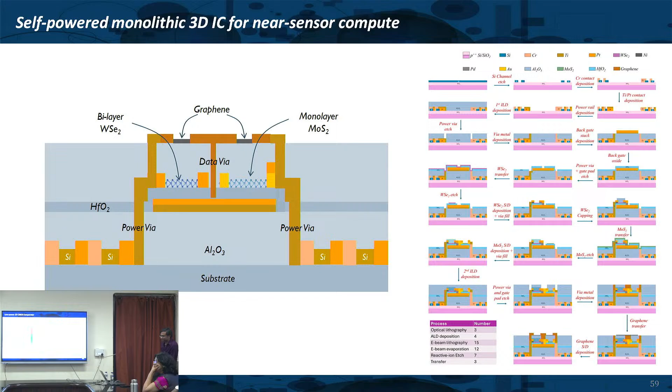This took a semester. Getting all the measurements done and getting the paper ready and stuff, it took us a semester, which is still quite fast. Generally, it will be a PhD. In my group, no. This is just one paper. This work is literally a PhD. You can see the amount of work that needs to be done. But that's just one semester's work. Sometimes even only 2 to 3 months. So if you are thinking of joining my group, you have to be prepared for the fact that we are literally non-stop.

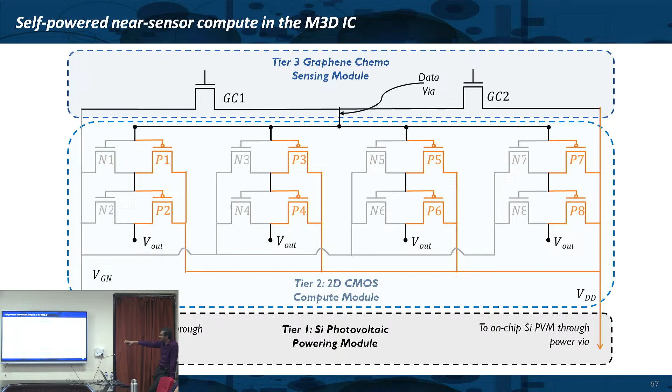And then we do a lot of design, which I can skip, and then we do all those chemosensing experiments, but now on this PV-powered chip. And these are all complex logic circuits. Let's not go into the details of that. So now we have a sensing module in the top tier, a compute module in the lower tier, and the silicon photovoltaic from the back side powering the entire chip. Okay, and then we do some very basic things. So you got it? This is a self-powered near-sensor compute in a monolithic 3D IC.

No, not published yet. Right now under review. Preprint, I am not sure. I generally don't put preprints because somebody may get that idea and do it, then we will lose it. So I generally am not in favor. Sir, if you submit to arXiv, or if you submit to some journal, somebody there can take that idea. Yeah, but generally arXiv is good. That happened with one of my friends. By the time it got published, somebody already did it and published.

Yeah, because generally publishing in these journals takes a year. I will probably put a preprint maybe 3 months out, when I know that this is going to get published, because I do not know whether the paper is going to get rejected, or how long the revision will take. So generally I'm not, because these are brand new ideas. Even though arXiv is there, whoever publishes the paper first gets the credit.

You see, if you have a Nature paper first, nobody cares whether somebody else has an arXiv paper. Which one will you cite? You will always cite the journal paper because it has been peer reviewed. An arXiv paper is not peer reviewed. So I'm not a very big fan of arXiv. I put things on arXiv which are more technical, no problem, even if somebody copies. But brand new ideas, I will hardly put out on arXiv.

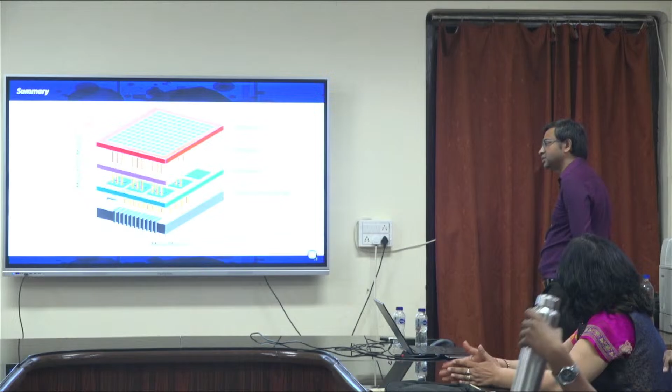So all these 2D materials, whatever you synthesize, are wafer scalable, and you use MOCVD? Yes, we are using MOCVD. Wafer scale for us right now is a 2-inch wafer, not an 8-inch or 12-inch wafer. What precursor do you use for the metal? We are using molybdenum hexacarbonyl, Mo(CO)6, for the molybdenum precursor. For sulfur, we are using H2S. For selenium, we are using H2Se.

So that means everything is optimized, the flow rate, everything? We are still optimizing because we still want to improve the quality of the material. These materials still have a lot of defects. I am not doing the growth, as I told you. I'm not a growth group. My collaborators, Professor Joan Redwing and Professor Joshua Robinson's groups, are looking into the growth of these 2D materials and trying to optimize it even further.

Okay. Done. This lecture is done.

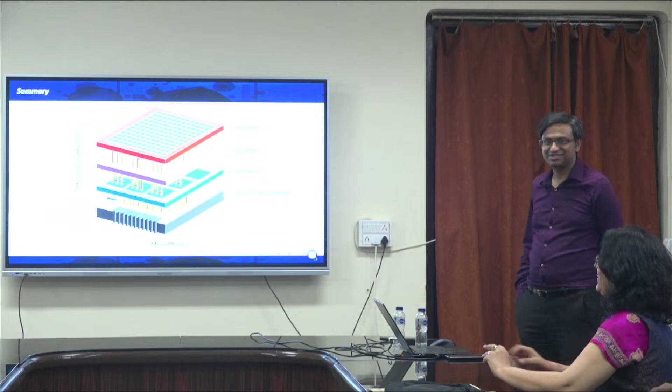Questions, I can take. I don't know how much time.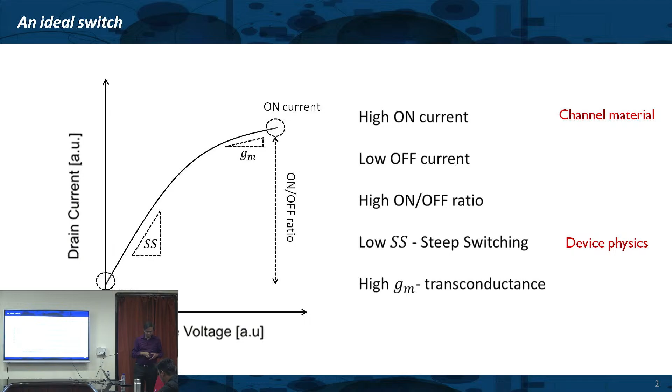Let me see if there is a good duster. No, it won't have. We can go to electronic charge and things like that, but I think you can mathematically show that it is 60 millivolts per decade. Let me try here. If I do it on top of this, oh, this is.

Many devices are there. You name me. That is our next slide.

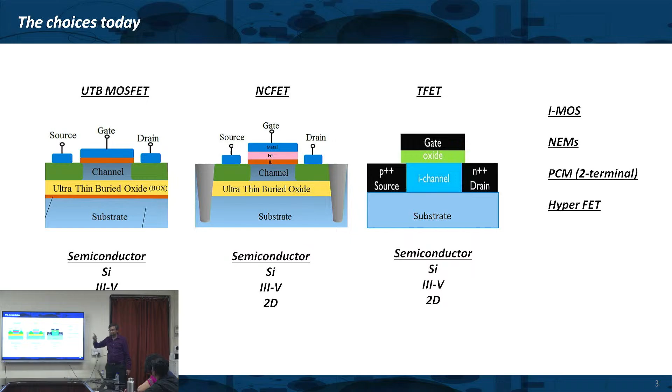Have you heard about these things? Who all have heard about, forget about NCFET, tunnel FET? You have heard? And there are also other options, let us not go into there. So, why tunnel FET? Tunnel FET and NCFET can give me below 60 millivolt per decade subthreshold slope. So, now let us think about tunnel FET. Why could it give me a better subthreshold slope?

Because tunnel FET looks very similar, but the IV characteristics should change. In this over here, there is a lot of things going on. I will not go into the detail, but what is this T? T is the temperature, but what is the temperature? Temperature of the electron that is flowing through the material. So, if you can somehow lower the temperature of the electron in a device while it is operating at room temperature, then you can get a subthreshold slope less than 60 millivolt per decade.

So, now what happens in a tunnel FET? Again, this is a long discussion, that is why I told this is quite an intense one, because a lot of fundamentals have to be covered. Let us now look into the MOSFET band diagram, right.

Okay, I need to really go to that side because this board is not really good. Let me go to the other, you guys sit, I will use the other side. No, just go back. Just go back a little bit. I will use this side of the board. Okay.

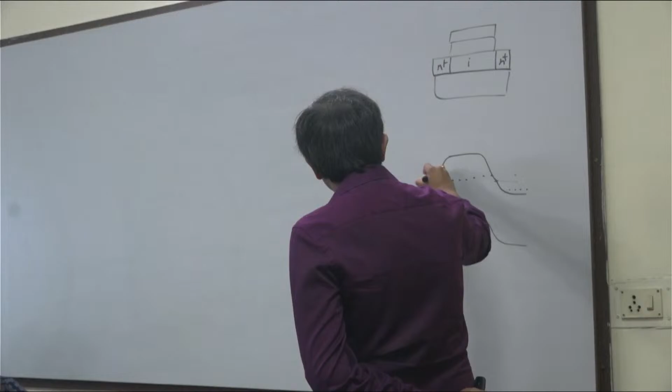Okay? And whenever you apply a bias in a MOSFET, you lower this guy on this side, and then the carriers go from this side to the other side, and this is the top of the barrier device. You see that the electrons have to go across the barrier, and by the gate voltage what you do is you simply lower this barrier. That is what your gate voltage does. It moves the band up and down, okay? While the source to drain voltage allows the conduction of current, you lower or raise the barrier by applying that gate voltage.

This part is clear. I mean, this is all about transistor. This is where you apply a VD. VD enables current flow in this direction, while the gate lowers or raises the barrier. So this is the off state, this is the on state. Now you see, when you have a large barrier over here, right, I am still getting current flow. You see, when the gate voltage is 0 volts, I still have some off state current.

How and why? Because if there is a barrier, the electrons cannot go from this side to this side. How am I getting a current flow? What is the origin of this off state current? Anyone knows? No, not tunneling, not leakage. What is that? It is not leakage. What is happening over here? No, that is only for short channel devices. What gives me the off state current?

Thermal current, but where is the thermal current coming from? Why is there thermal current? No, this is not minority carrier. Huh? No. Okay, don't use big words. Okay? It is very simple. What determines whether an energy level will be occupied by an electron or not? Fermi function. You guys remember Fermi function? How does the Fermi function look like?

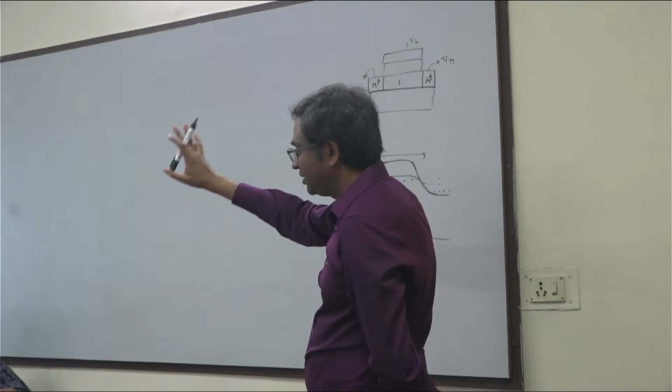Okay, and I cannot change this Fermi tail at a given temperature. That is why I cannot change my subthreshold slope. Make sense? Right? So this is what prevents a MOSFET from becoming better than 60 millivolts per decade, right? Because given a temperature, this tail is fixed. I can't do anything. Okay? Now the question is, how can I lower the temperature of the electron by doing some tunneling?

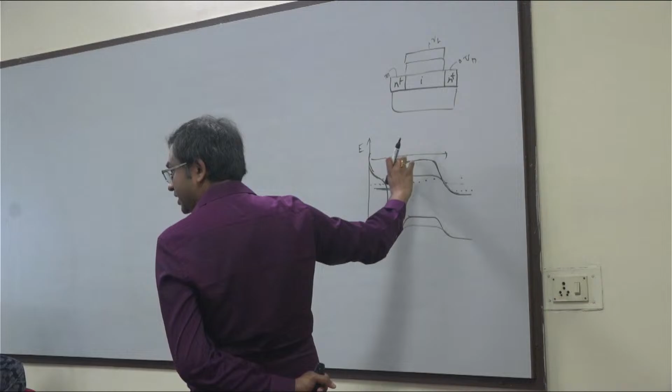So in a tunnel FET, what happens is, okay, again I will not draw the full picture. There you see the on state is where you have no barrier, and the off state is where you have a barrier. Tunnel FET is actually the other way around. You put the barriers like this. Okay. Now you see you have a Fermi tail, even this is also doped, right? So here, of course, nothing is there, almost 0. Here you have maybe a finite Fermi tail, from which the electrons are going. Now the barrier is even higher, correct?

Now, although these electrons cannot go this way, they can tunnel through, if this tunneling barrier is actually very small, right? Now, when they tunnel through, they are coming from the low energy part of the Fermi function. So that makes their effective temperature lower. These are cooler electrons, these are hot electrons. You see, so therefore, although your temperature is room temperature, the effective temperature of these electrons is cold, because the average temperature is what is the T, correct.

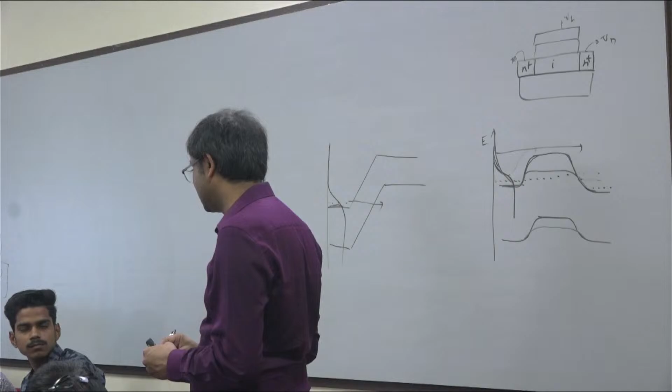So, if some electrons are hot, some have to be cool, right, and it is the cool electrons that go through. So, in that expression T no longer remains the ambient temperature, but becomes the electron temperature, and that gives you better than 60 millivolts per decade subthreshold slope. Make sense? So, that is the idea of tunnel FET. NC FET, let us not cover that, that will be too much. Tunnel FET requires a full lecture again, but I just wanted to give you some idea.

Yes, average. No, you have to make sure you understand this very clearly. Average energy of an electron is proportional to temperature. If you have 3 degrees of freedom, it is 3/2 kBT. Okay, average. Very big difference. That means there are some which are more, some which are less. Right? If it was not average, I could not do anything. So this is because it is average, I can use the lower. That is the engineering part, where you take help of the tunneling to use the lower energy electrons, and therefore the effective electron temperature is low, so you get a better subthreshold slope.

Okay. Each of these devices works on a very different physical phenomenon. For example, this impact ionization MOSFET, I will just tell you about that because this is a little bit easier to understand. So, we heard that I cannot change this kB, I cannot change this q and T for MOSFET, but now I could do something with the temperature to get it less than 60. Anything else I can do in this equation you can think of?

This is exactly where innovation comes in, right? When we see the equation, we say, oh, we can't do anything, forget about it, right? But somebody came and reduced this T. Now I will go and change this. How? That is a fundamental constant. I cannot change a fundamental constant, so I have to do something ingenious, you know.

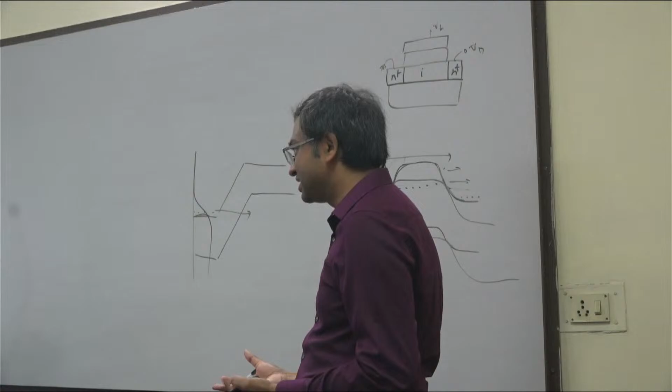So if I can apply a very large bias, I can introduce one, but the number of electrons that will come out will be many, if I can introduce an avalanche process in this junction. Just go and read about a reverse bias PN junction and how the avalanche process takes place. That is impact ionization. It happens because one electron here is extremely energetic.

It goes and knocks out another one, but now there are 2. These 2 then each knock out another, so it becomes 4. 4 becomes 8, and you get a lot more electrons. That means more current, right? So therefore, this curve goes straight high. It can be controlled. So read about impact ionization MOSFET. That is another steep slope transistor.

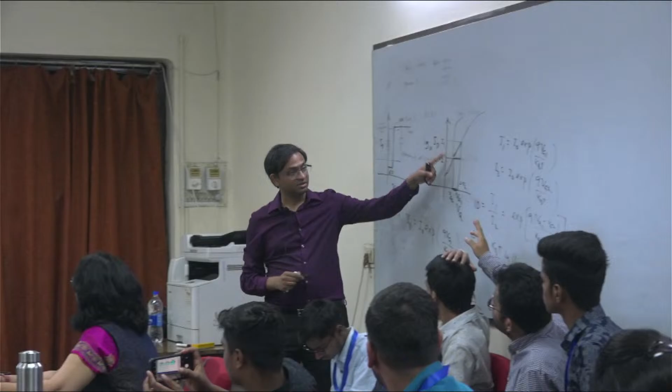Which question? This, the reduced value. This n could be 1000. This could go down to microvolts. So therefore, know the equations well, right? Then you can go and engineer them. If you say, oh, Q, KB, unfortunately we cannot do anything. So these are the two, but the NCFET is a very different concept. We will not get into that.

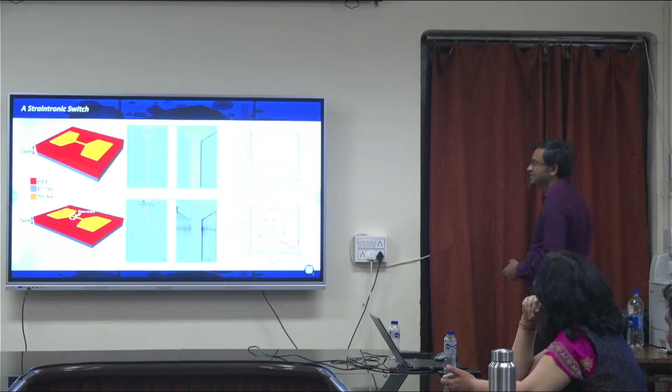So now I am going to introduce our straintronic switch. What else can we do? You saw we have exhausted options. So how do we innovate beyond that? That's what we have to do in research; it cannot stop here. So here is a transistor which is very simple actually. It's a straintronic switch on a PZT material, a ferroelectric, or also piezoelectric, material. What is a piezoelectric material? Anybody can tell me?

Or the other way around. If you apply a voltage, you can create strain, right? Okay. So this device is actually very simple. This is just a metal line over here, and you see, if it's a metal line, if I apply a gate bias, should anything change? No. That is what we have been learning, right?

But see, something wonderful happens when you put this metal line on a PZT substrate. Why? Because when you are applying a gate bias, you are also creating strain, and then the strain goes and creates a crack in my channel, which is reversible. Generally, cracks are never reversible, right? If you have a crack in a glass window, can you ever get it back? No, it just keeps increasing.

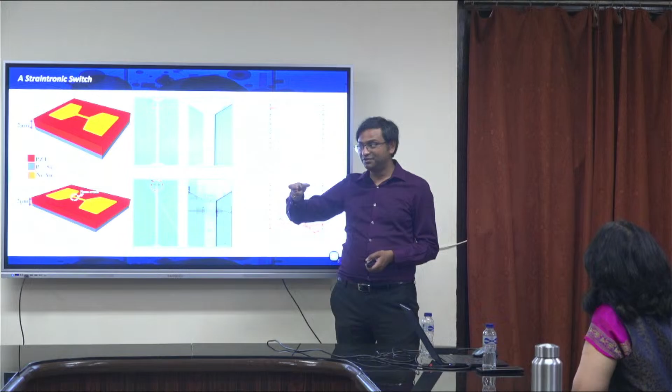But for the first time, we found that these cracks are electrically reversible. If you close the voltage, you see it comes back. So if you have a crack, no current flows, off, right? And when it is not there, it's just a metal. So at the end of the day, the best switch is what? Metal in the on state, insulator in the off state.

Then I don't need a semiconductor. It's just that I cannot make a metal into an insulator. So what do I do? I make a crack. The crack is an air gap. Perfect insulator, the best insulator I could ever have, right? So now I get a transistor, right? Look at the numbers over here.

Subthreshold slope, this is probably not the best device, 0.34, already 100 times better in these devices, but this actually requires a forming. You have to do a multiple process. We will not go into detail of that. And look at the on current. The on current numbers are milliamps per micrometer.

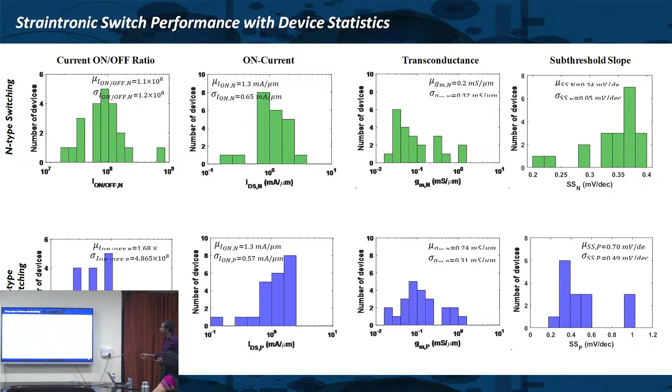This you cannot achieve even with silicon technology, right? I mean, this is what silicon technology can only aspire to do. And we get very high GM, off current is very low, literally limited by the noise floor of the instrument. And here I am comparing with TFETs. You see, these are the numbers that people have achieved: 3.9 millivolts per decade.

This is NCFET, negative capacitance FETs. This is typical for MOSFETs, not 60, more because there are a lot of non-idealities. And look where we can get. We can go down to even 0.6 millivolts, so 600 microvolts, because it is just the perfect switch that you can make, just by doing this cracking process, with very simple materials, nickel and PZT. You can also do it with graphene.

So you can put graphene as a channel, because at the end of the day, remember, we also need GM. Metals will not give you GM, there is no gain, because there is no change in current as a function of gate voltage. So I have to bring in a channel material that will give me highest mobility, highest GM. And graphene we could not use for normal transistors, but now I can, because the on state will be graphene, and the off state is just an insulator, which I could not get with graphene because it did not have a band gap.

So now if I do that, this is what happens to a graphene transistor. Now you see there is some gate voltage dependence, and then it drops down abruptly. So I get a high GM as well. So here you can see I have been able to achieve 1 millivolt, 1.2 millivolt, and on currents are even higher, tens of milliamps per micrometer. There is some stochasticity, we will not go into that. This is a completely different switch, because we changed the physics completely.

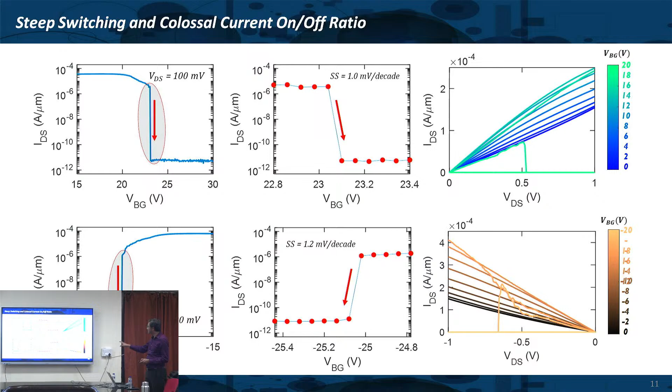But we know that this is almost done. So we are already at the end. I will skip this, and we use it for many different applications. We also made a PUF, a straintronic PUF, using that. I told you anything that you create, the first thing you do is a PUF. We are also looking into some neuromorphic applications using these straintronic switches. So with that, we come to an end, and I think the time is also over.

This is published. I can give you the paper name. There are actually 3 Nano Letters papers that we have published on this topic, 2 years back. Yeah, I will give you those details.